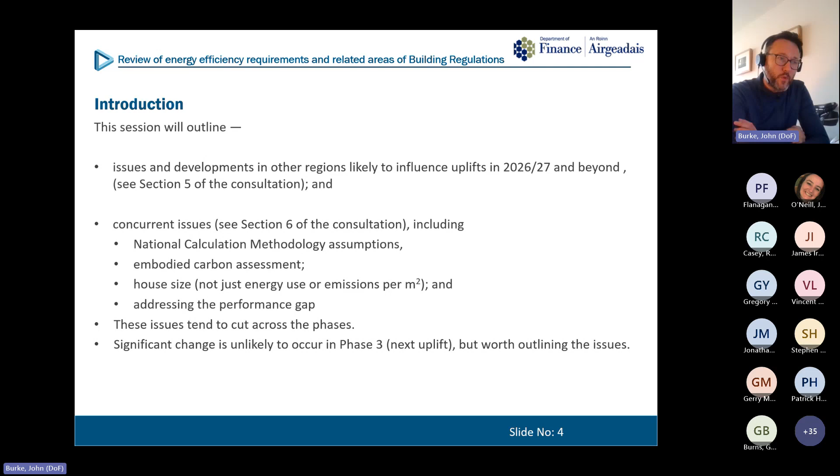But these issues are quite complicated and, as I say, quite cross-cutting, going across different administrations and all sorts of different things. So we don't see them as being able to be changed in time for phase 3, because phase 3 and the uplift needs to progress. But we do think it was worth outlining them for this broader perspective.

So, as this slide says again, the last measures introduced in England were intended to go as far as possible whilst acknowledging that the transition to low carbon heat requires market technologies such as heat pumps and the associated skills to be significantly developed. So these are informing proposals.

England's last uplift is informing proposals for our phase 3, and that's what the bulk of the discussion in these sessions has been about to date. But there is a strong indication in some of the early tentative moves towards future building standards or future direction of travel that's been outlined by England.

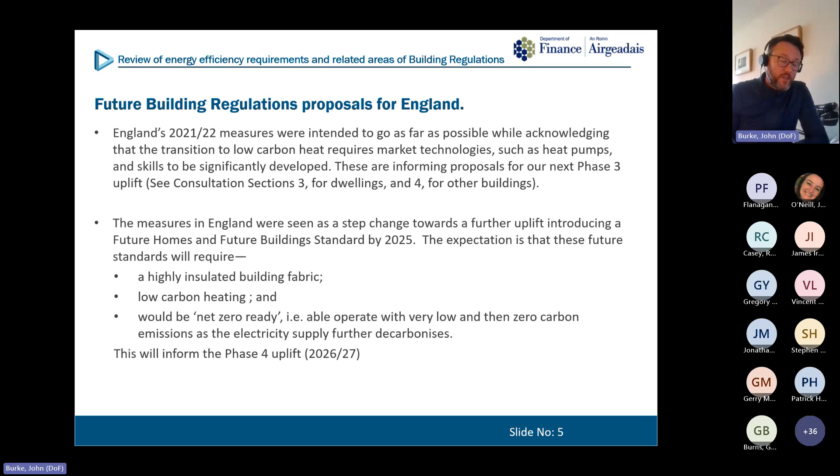The expectation for phase 4 is that we would have buildings with a very highly insulated building fabric that would use low carbon heating and would be viewed as net zero ready. This means they would be able to operate with zero emissions eventually when the electricity supply is fully decarbonised. So they may not be net zero on day one in terms of operational performance, but as that electricity or district heating supply decarbonises, you'd find that by 2050, or earlier hopefully, they'd be at a net zero level of performance. That broad expectation is central to the phase 4 uplift considerations.

In terms of timescale, we're waiting for DLUHC's Future Homes and Future Buildings consultation that's expected soon. But we're also cautious because quite often consultations and proposals come through that are significantly changed before they're actually implemented in England. We need that implementation in place to be clear on where things stand so we can take our developments from that, and we don't want to delay getting on with doing something meaningful in the interim.

So the department's phase 3 work is intended to ensure improvements are progressed as far as possible in that interim. Phase 4 measures will then adopt or learn from England's Future Homes or Future Buildings measures, meaning phase 4 would likely occur in 2026 or 2027. There are some details and hints around what that Future Homes consultation might look like.

When we talk about having high or good insulation values, they've outlined typical U-values of 0.15 for walls, 0.11 for roofs and floors, and 0.8 for windows. There's a fairly strong suggestion that air tightness might be 3 cubic metres per hour per square metre at 50 pascals, but it could be less.

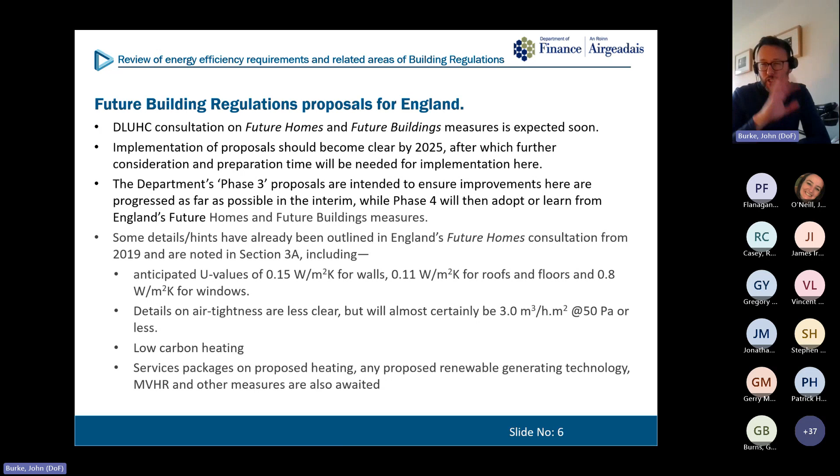They've intimated that low carbon heating would be an expectation, but other services packages and various flexibilities that might apply to different building types would all need to be considered to see whether this is appropriate or viable in those circumstances. That's the overarching position we have, or can see going forward.

Alongside that, there will be consultations on SAP and SBEM, the domestic and non-domestic national calculation methodologies, and we'd anticipate those consultations occurring alongside or as part of the Future Homes and Future Buildings developments. We encourage local responses to that because we're so reliant on then adopting the UK's methodologies and things that flow from that.

But at the same time, that's what's in our section 6A here - we're keen, because we will have discussions with the UK government at various stages, or we're trying to come to terms with it all, that if there are any local issues or particular concerns or feedback that comes through, we can gather that together and maybe have a particular influence on how that rolls out in England. So the different fuel mix and context here might be important in informing how that goes.

It was just to signal to you that there is a review of SBEM. We are aware of that. I think it's principally dealing with industry stakeholder engagement, but they're looking at reform of some of the activity classes and characteristics that apply to non-domestic buildings.

They're looking to update that from evidence from those various building types and building classes to get a more accurate benchmarking about what level of improvement might be possible. Clearly improvements in some building types like hotels might be of a different order to the scale of improvement that might be viable in a largely unheated warehouse, for example. They have different profiles, different characteristics, and there's a lot to be explored in all of that.

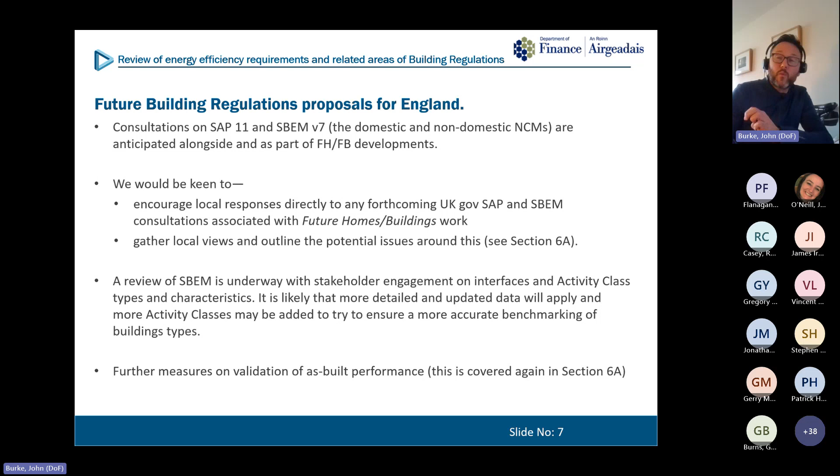Similarly, we'd expect that in the future homes and future buildings work, there'll be work on validation of as-built performance and how that might be improved or seen. We really do learn from and build upon some of the lessons involved there. So whilst we are gathering evidence here and will try to use and communicate that, that shouldn't rule out direct input - we'd really advocate for you to consult whenever these consultations come through from the UK government.

So that was future homes and future buildings and what's happening there - that's the building regulations proposals for England. Another strand to this is developments in boiler policy. We've outlined something on that.

The CCC advice reports - this is the one we've quoted for Northern Ireland, but there are similar approaches being advocated for other parts of the UK. They're pushing for a position where all new heating appliance installations should be zero carbon, with earlier application to homes off the gas grid. This has implications for supporting infrastructure and the electricity network, so our colleagues in DFE are mindful, and it also leads to challenges.

There are also obvious challenges in installing low carbon heating systems in existing buildings, in that they tend to work best with low temperature heating alongside fabric and efficiency improvements - it needs that whole integrated package to work best. We're mindful other regions have similar mandates or directions, but there's no clear provision yet as to how getting to a point on this particular issue - boilers, particularly replacements in existing buildings and dwellings - is actually going to be achieved.

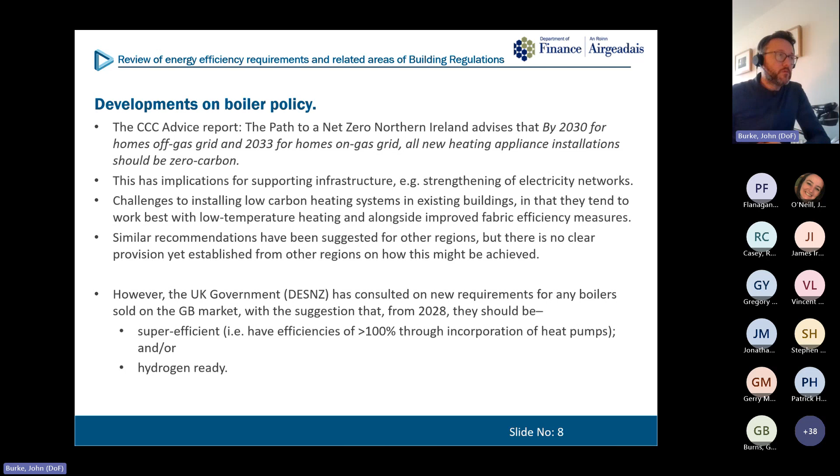Admittedly the timescale on it is a little way behind future homes and future buildings, but it is looking at retrofit boiler replacements, and it's unclear if it would be implemented via building regulations, which would set the standard for replacement boilers when installed, or whether it would be done via a product standard. If it were a product standard, that would mean it wouldn't really be a building regulations matter - the only boilers that could be sold would be off this level of provision. There might also be something in future homes and future buildings on this area - we'd need to wait and see.

But we think the principal focus of future homes and future buildings will be on the new build standards. Any proposals to require hydrogen ready or hybrid heat pump boilers in GB could be subject to the Northern Ireland Protocol. There's an issue there potentially, if we were changing product standards, as to whether GB product standards would apply here, or whether EU product standards would apply, which would be more eco-design perhaps.

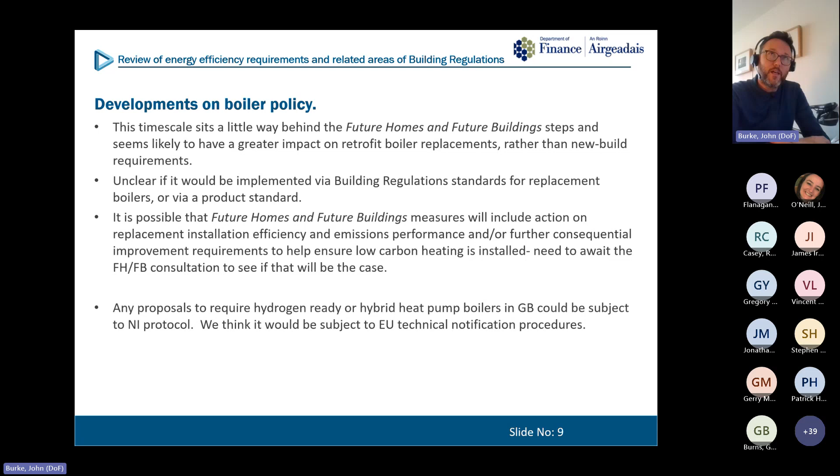That's all quite a complicated area, and with EU notification procedures to prevent barriers to trade and things like that, it all becomes quite an interesting or fraught position for us to consider, especially as we are only really a building regulations unit. So the wider position on that is a developing picture.

We're also mindful, if we move away from England and take a slightly wider approach, there's some really significant developments in Scotland that we think we've drawn people's attention to in the document. There are two significant measures: one is effectively a ban on direct emissions heating, or a requirement for zero direct emissions heating in Scotland, and the other is a commitment to develop new standards such that Scottish building regulations would require a passive house equivalence standard.

If we look at the ban on direct emissions heating, which is due to apply in Scotland from April 2024, it's preventing basically any combustion appliance for space or hot water heating in new dwellings or new buildings. I think that would also include what they call conversions or material changes of use to create a new dwelling or new building, subject to a building warrant application from April 2024.

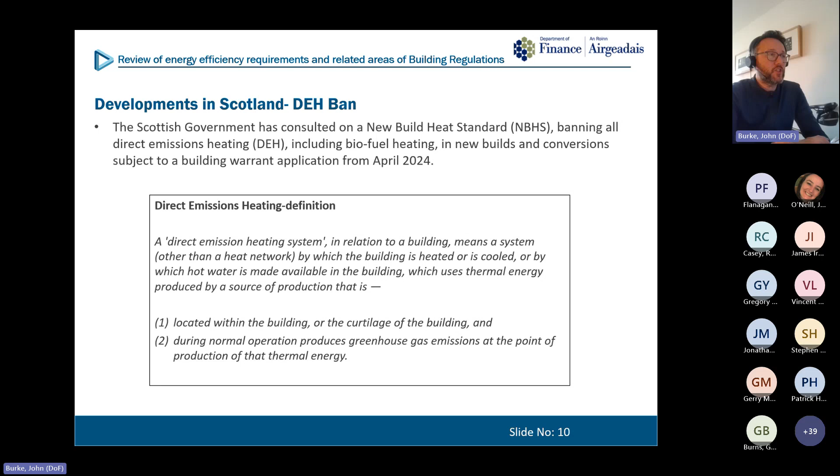There's a definition for direct emissions heating, but it basically means no tailpipe emissions in your building. As such, we think that means you'll be effectively restricted to electric heating or district heating, with electric heat pumps likely to be dominant given the extent of district heating currently in operation. It'd be quite hard to meet the Scottish standard with direct electric heating.

This is because of the primary energy, the delivered energy target that would emerge. It's worth saying this is a slightly separate measure to the way uplifts in Scotland and other UK regions have typically been delivered, in that rather than a refresh of the notional dwelling you compare yourself to, or an overarching review across the part, it's a very specific requirement just saying this kind of heating is not acceptable or not permissible. It doesn't change the emissions performance requirement or the delivered energy performance requirement that Scotland has.

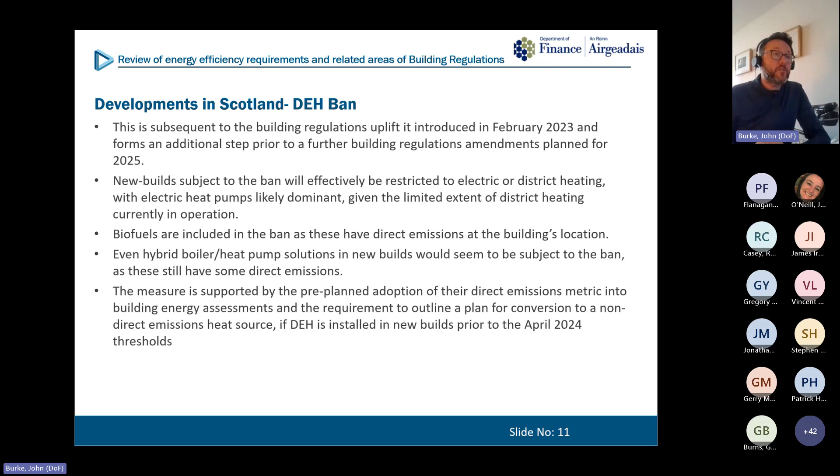The measure is supported by the pre-planned adoption of direct emissions metric. They've always had that in building regulations assessments, and the requirement to outline a plan for conversion to a non-direct emissions heat source if direct emissions heating is installed in new builds prior to the April 2024 threshold. Some of their earlier uplifts have been signalling this to some degree, that you had to plan for how you were going to change to a zero direct emissions heating system in the future. If you were using a gas boiler, oil boiler, hybrid or biomass, you had to show how you were going to move away from that as part of your application. I don't know that there were many tests around that, but you still had to provide that assessment.

The second significant measure coming through in Scotland, which has a Green Minister working on this, is they've committed to develop 2024-25 proposals with a view to implementing new build standards equivalent to passive house standards. So they're looking for a Scottish passive house equivalent, and we've been hoping to monitor this or see how this reviews or comes to be. But again there's quite a lot of issues that we see with that.

It's worth noting that full Passive House certification expects the use of approved designers, products, software and installers that have all been approved by a private sector body. So there's an issue there to ensure performance and build quality. Our building regs don't give us absolute powers on that. We can suggest it strongly in guidance, but we can't limit work to being done by just one profession or one group - we can't do that absolutely. It's also anticipated that because of that, they're looking for Scottish equivalent performance rather than actually requiring Passive House standards.

So that's noted, but the reforms will look at both the performance metrics and the verification measures. This is happening concurrently whilst England does its thing with future homes and future buildings standards. This Scottish activity is happening in a quite potentially different way of approach.

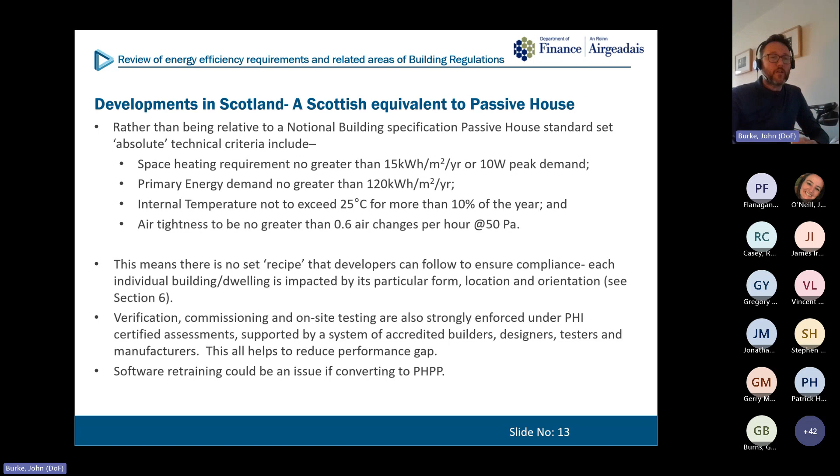Verification, commissioning and on-site testing are also strongly enforced under the Passive House Institute certified assessments, so there's extra layers of accreditation of the people doing the work, and that really helps reduce the performance gap. There are extra tests and things that would need to be there. Software is seen to be quite significant as well - the use of Passive House planning package would be a really significant thing if that were to be used instead of SAP or trying to retrain everyone in that direction.

So we're really monitoring the developments there, and we'll see what happens. But we are trying to be involved, or at least observe, and to see how the discussions on that resolve with Scotland.

Both of these scenarios tend to push significantly further towards the electrification of heat. So you would need to take into account the deliverability from a skills and overall kind of way, but also on the grid impacts and things that happen in relation to the grid. Our electricity grid in its current state is clearly impacted quite dramatically by quite a lot of that, if that were all to happen all at once.

And we'll also be passing on that this is happening through to our colleagues who are working on grid policy and grid areas, and to the utility regulator here, because we know that system is under, and grid reinforcement charging system is all being considered by our colleagues in other departments. So the outcomes of all of that interact with this.

We've said before, building regs can't completely restrict work to licensed or accredited designers, installers or testers in the way that the Passive House system promotes. So that's not always possible, although we can strongly hint at it with guidance, but there should always be an alternative way to compliance. Again, we're monitoring the outcome.

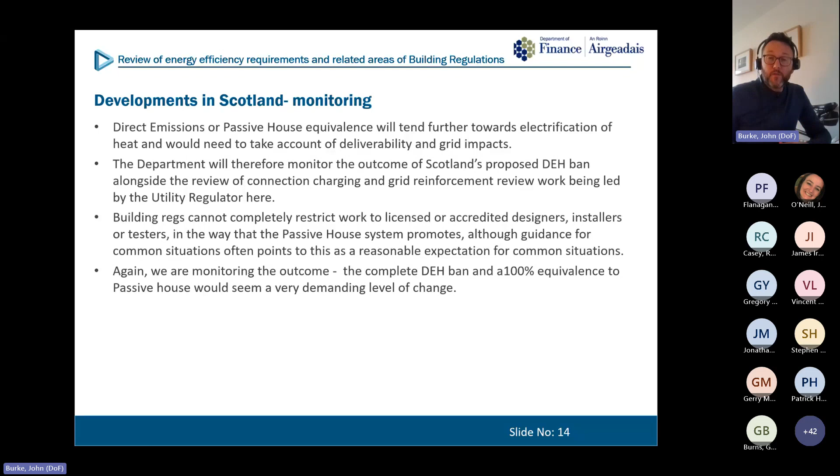The complete ban and 100% equivalence to Passive House - if you were to absolutely do every single 100% thing that was in Passive House, which some of the advocates for it would say is necessary because it's a complete package, it would seem really quite a demanding level of change. But we're keeping an eye on it, and we'll see what we can do, and if it goes well, that's certainly something that will be informative to the phase 4 proposals for 26 and 27.

Another major review that's underway is a more pan-European, pan-EU development, and that's a recast of the Energy Performance of Buildings Directive, which has some very significant potential uplifts. Now, obviously, we've left the EU, so there's no absolute requirement to implement any of the things that are in it. However, we don't think that it's embedded as a Northern Ireland Protocol issue.

It's not about products or standards that are passing across the border, but obviously it will inform developments in the Republic of Ireland, working with there, and obviously it sets a kind of tone or level of expectation across administrations, which bears consideration. So the aspects of this which might be applied through the building regulations - I think it's important to outline not everything in the EPBD is a building regulations matter at all.

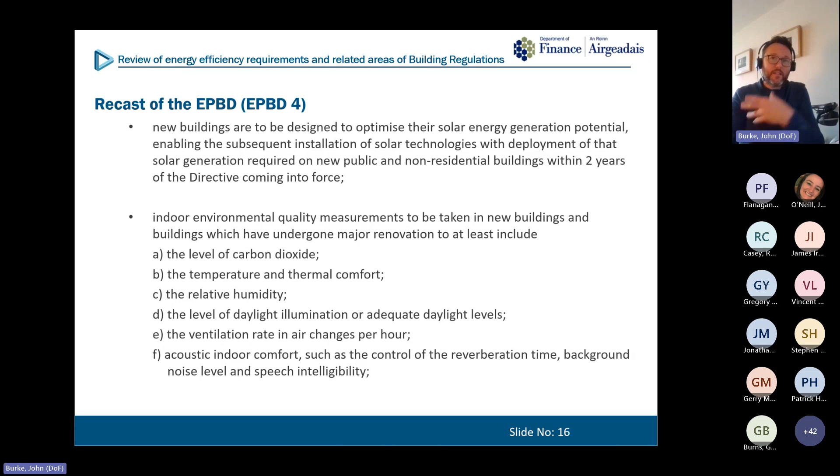These are quite demanding multiple performance requirements that would all have to be brought into play and added to the regulatory provisions. It includes continuous energy monitoring in certain buildings, and it also has measures for increased levels of provision.

There was a session last week on EV charge point infrastructure, and it looks like the EPBD is already moving on from that to require higher levels of provision and to include charging for e-bikes and similar, taking efficiency of load management and the grid into consideration with pre-cabling.

So quite a lot of extra things in there, and one of the significant ones being that any charge points would need to be able to support bi-directional charging, so they'd be able to export from your car to the building as well as charge your car from the building. That balancing and smartness is all starting to come into play there.

There are a number of measures that go beyond the scope of building regulations with a focus on requiring or promoting retrofit. They include new energy performance requirements, looking at EPC bands of performance for existing non-residential buildings, and then applying that to existing residential buildings by 2030, 2033. That's an interesting challenge.

It's worth noting that the EPC banding probably wouldn't be in line with the cost banding that's used, for example, in domestic EPCs here, which is a cost metric. I think most EU regions have a primary energy banding metric—certainly the Republic of Ireland does. So how you band all of that is another whole issue that's in the directive.

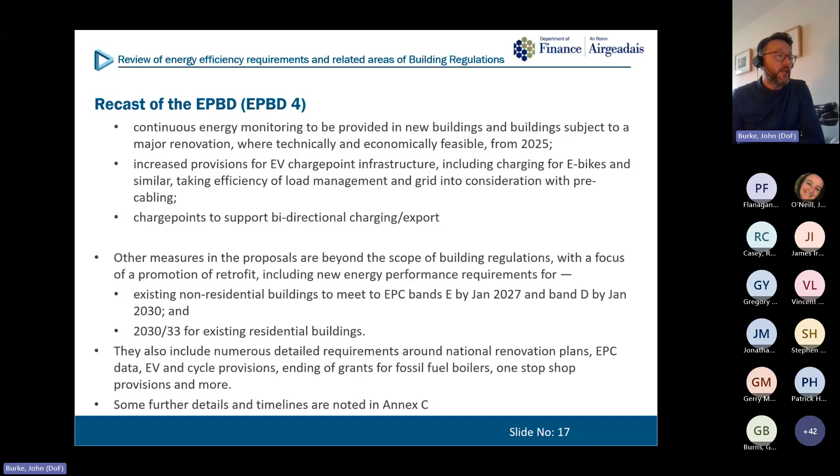It goes on and on, there's quite a lot of it. But basically, elements in blue we've suggested might have been for building regulations had we been subject to this directive, and items in green might have been for other measures—principally, most likely, many of them under the energy performance of building certificates and inspections regulations, or under some similar provision, or led by another department altogether.

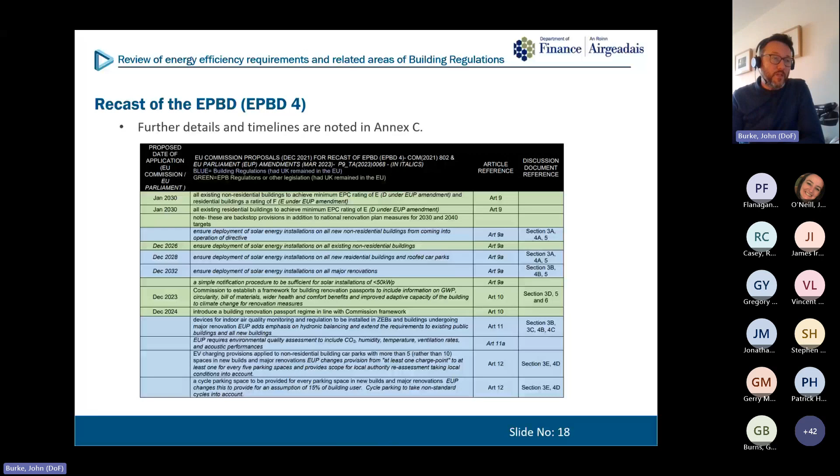So it's the blue ones there that may have been most applicable to building regulations. That's not to say there couldn't be some degree of interchange around that—it would have needed to be discussed interdepartmentally.

So where does that leave us with our proposals for phase 4? Well, to summarise, we expect to maintain a watching brief on all these developments to help inform phase 4 and beyond. We'd still suggest the proposals are likely to be significantly influenced by developments in the Future Homes and Future Buildings programme in the first instance, but we await the consultation on that and we'll see how that goes.

In any case, and this is the benefit in pushing this message out to industry, it's really likely that very high fabric performance and low carbon heating, such as heat pumps or heat networks, would be the standard expectation for new builds here by no later than 26, 27. That's the direction of travel, and I think we can be fairly clear that's the mark or the way we're planning to go.

Aspects of much of this may be included, or some of this might be included earlier. We do have an option for phase 3 to go with a heat pump led notional dwelling, and that might bring some of this thinking forward a bit if it were to be adopted, but it's a very challenging prospect to try and implement.

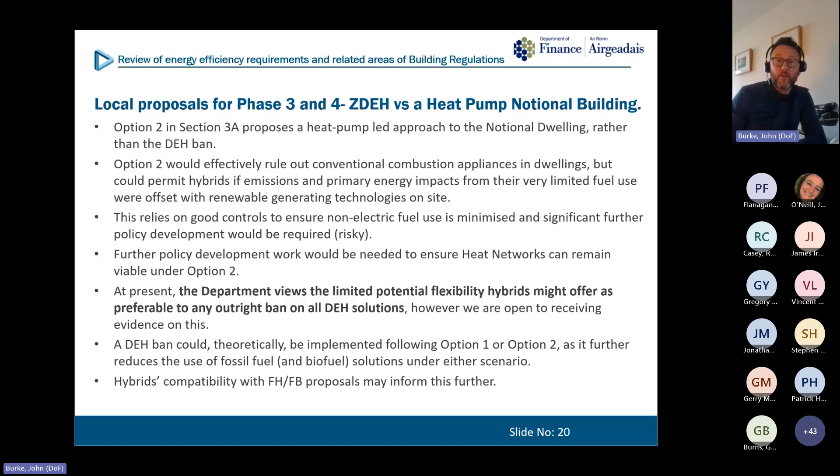Similarly, we don't know what the position will be with hybrids and how they're planning to be treated under Future Homes and Future Buildings. So again, a lot is hanging on what comes through in this consultation from England, where we're not aware of the details yet. We're keen to try and find out more on that, and how that goes, and where that leaves us.

Similarly, when we look at Passive House and the proposals there in Scotland, we'll follow how that works. We go on and discuss a bit later some of the absolute metric principles and how that works. So there are clearly advantages in having absolute metrics. It means every house gets a similar regular outcome, not inadvertently badly affected by its location or altitude or different conditions. Everyone's treated equally in terms of bills and running costs, but not treated equally in terms of capex, the capital expenditure to get it done.

So there are pros and cons. There are reasons why a notional dwelling specification was proposed and developed years ago, why we compare to that, and those reasons still exist. By having a notional dwelling specification, you can set up a system that will always guarantee compliance. If you move away from that, you've got less standardization, and that's likely to slow your delivery, because every single home and location needs reconsidered and adjusted, unless you're significantly passing the targets in the first instance.

We think there are quality assurance aspects on the build, so the whole Passive House system requires everything working, and that means there's lots of societal and skills improvements needed to ensure you get that whole piece working together.

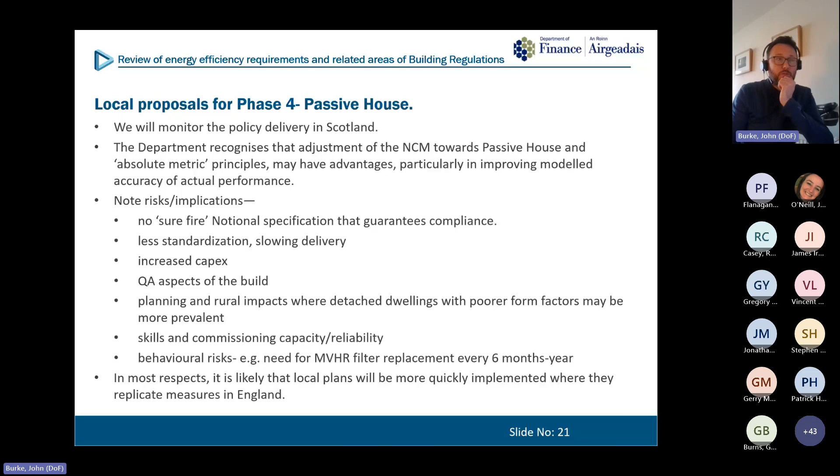Again, as with phase 3, anything that gets done in phase 4 has this wider cross-departmental interconnection with a world of lots of other issues that we're all reliant on. To the extent where I've had to change the font size to be smaller so it all fits on the slide. But the list is there. It's the same as phase 3.

We're affected by grid, by skills, by what happens in terms of smart systems and smart meter rollout, flexibility, and management of peak loads, and whether our grid can cope in the same way the GB grid or the grid in other regions might. You're looking at implications on EPC fitness and how you would migrate from one system for EPCs now if you moved to absolute metrics rather than using UK averages, and how that would interact. It's a really complicated picture how that all works together, and there will be mutual interrelated issues to be resolved or reconsidered in the midst of all of that.

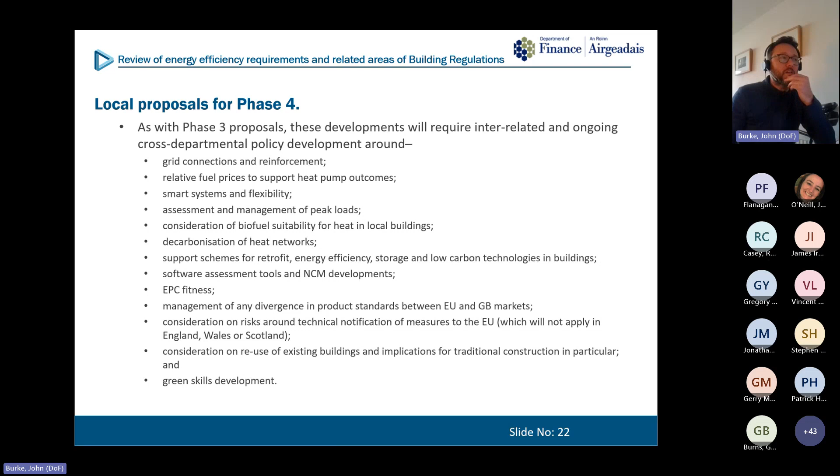So the list is there. At the end of phase 4, the end of section 5, we have a number of questions that go through what I've been discussing, asking for your input, asking whether you think it would be best to align with future homes and future buildings more straightforwardly and quickly, and not spend too much time possibly being distracted by other tantalizing options being developed elsewhere, because it could just lead to delay and might not actually get us anywhere.

Would you support a ban on direct emissions heat generators? Is that something you think is a viable or better route to look at? Do you support alignments or efforts to align targets toward passive house where possible, if that's how that goes, or have you any experience on that?

And bear in mind how that would be enforced and delivered. It's a different thing doing it as a voluntary measure as opposed to how it all actually gets enforced - quite a different context. Do you have any advice as to how further verification measures might help ensure the standard is delivered in practice?

So we're relying on things like third-party certification of mechanical ventilation systems and acoustic tests on mechanical systems, and maybe in situ testing can be done for heat transfer coefficient, or hot plate testing on walls and things. So we're open to receive all that kind of evidence.

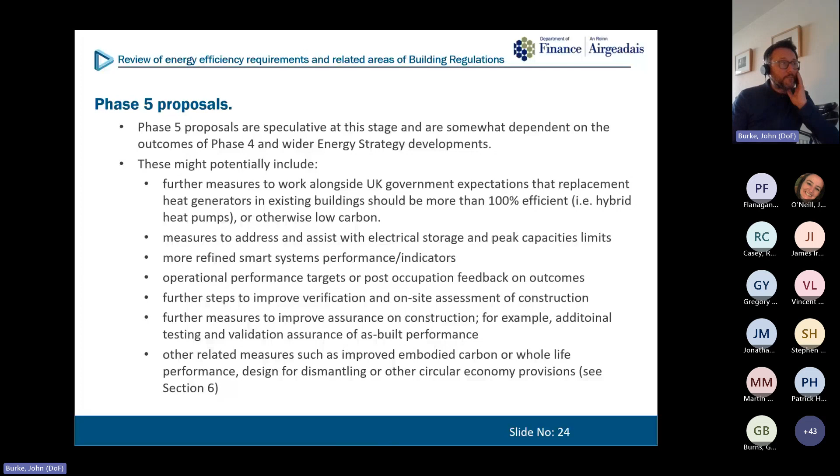So if we pause for breath for 1 second, those are the kind of specifics for phase 4 and phase 5, section 6, and they were covered in section 5 of our document.

Section 6 of our document is a slightly more complicated area, because it's looking at the uplifts and the various proposals and everything else, but there seem to be concurrent or cross-cutting themes that in theory could equally inform some of the developments in phase 3, 4, or 5. They could apply almost at any stage, or on some occasions they're almost matters of fundamental principle, where we need to challenge ourselves to think: are we designing to the metrics, or have we got the metrics right, for example, or do these other things need to be considered?

And even if we are right, I think it's important that we take a little time to review them and check and be clear about why we're doing what we're doing. There are some areas where it's all to play for, or all to consider. We've identified 4, but undoubtedly there are more, and there is more complexity to all of this. It could go on. We'll take any comments back, but these were the 4 that came through as the most relevant or important.

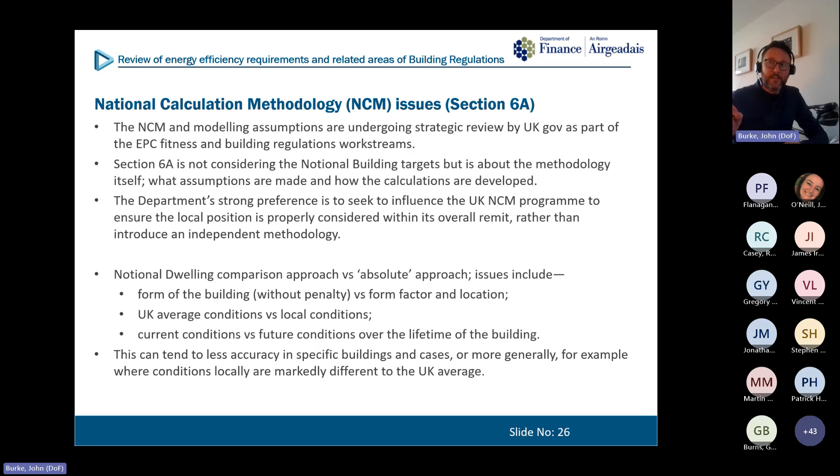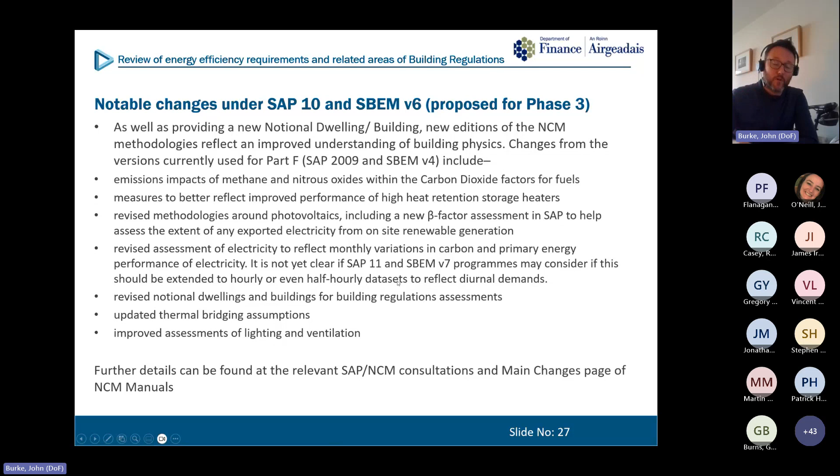I'll not go through them all, but it includes more emissions, updates the notional dwellings and buildings for building regulations assessments, and changes the way lighting has been assessed because they've improved understanding of the building physics. One big change is that SAP has now been revised to assess the extent of exported versus self-consumed electricity on site for dwellings, though not yet for non-dwellings. But those kinds of changes are typical of what happens with each edition of SAP.

The notional dwelling, as I've said before, compares a relative approach versus the absolute approach. It looks at these things we've discussed, and it has a tendency to have less accuracy. Many of these changes will be reflected in both the notional building and the actual building when dealing with building regulations. So if you have one set of assumptions for the notional building applied to the actual building, there's relatively little impact.

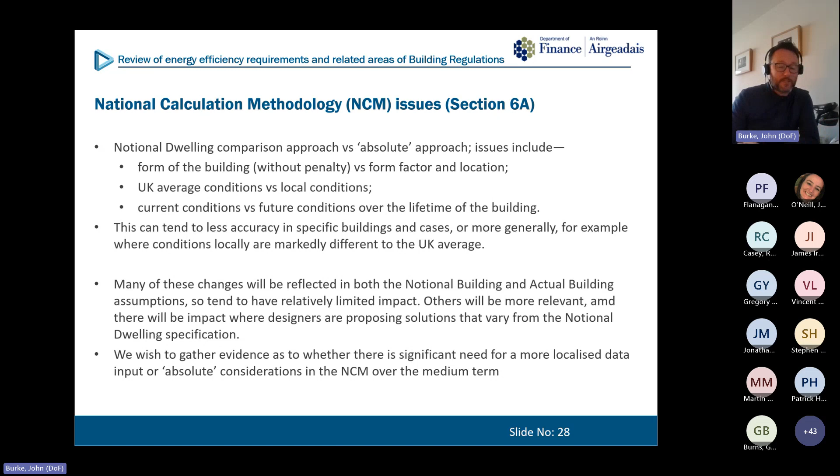So if you assume a UK average location for both your notional and actual building, there's maybe relatively little impact in trying to get building regulations compliance, because you've got the same set of assumptions applying to both. For many of those situations that's fine, but it means your outcome is less accurate to what you actually get. If you go with an average location, you should have a less accurate outcome compared to the actual performance. This is why SAP and SBEM are viewed as a compliance tool, not a design tool. That's kind of critical and important.

Here's an interesting example included in Annex B, relating to some of our options for new dwellings and the modelling we did there. In this scenario we've got three different carbon factors that can be applied: one is what's applied in the new version of SAP, the carbon factor applied in England; one is a Northern Ireland estimate, which is what we think the current carbon factor for Northern Ireland actually is; and the interim one is the current DEAP figure used in the Republic of Ireland, which takes a longer-term, about 10-year forward-looking projection of what carbon emissions from electricity will be. When we model our various buildings, we've got two notional dwellings here.

One's a gas boiler with photovoltaics and one with an air source heat pump. Under the SAP assumptions, the air source heat pump has regulated emissions of 388 kilograms, whereas the gas boiler with photovoltaic has emissions of over a ton. Both of them, incidentally, are quite significantly improved from the current position, but there's really significant improvement with the heat pump.

However, if you apply the local carbon estimates to that, you get a kind of reversal of that position, because you're getting significantly more value for the electricity generated by the photovoltaics. It's offsetting 340 grams for each kilowatt hour of electricity generated by the photovoltaics, whereas the heat pump is consuming 340 grams of carbon for each kilowatt hour of electricity it uses. So if you were to base it entirely on today's scenario, you'd end up with almost worse emissions, because there's no photovoltaics on this building but lots on that one, and because you're electrically heating this building. But that's not likely to be the long-term position.

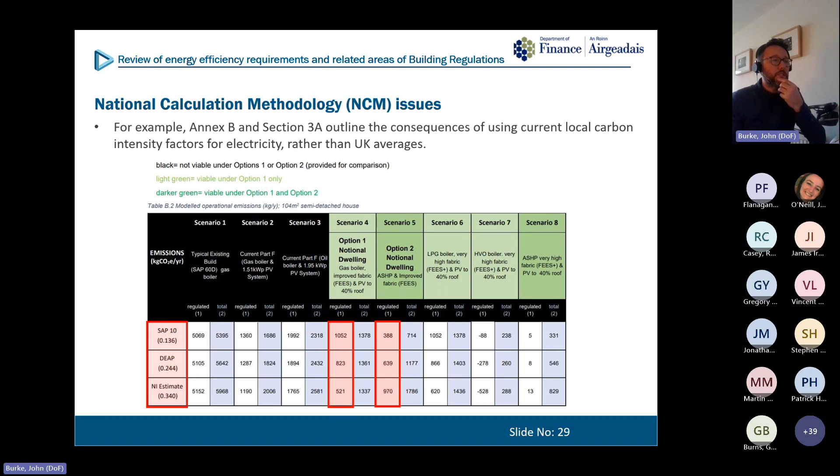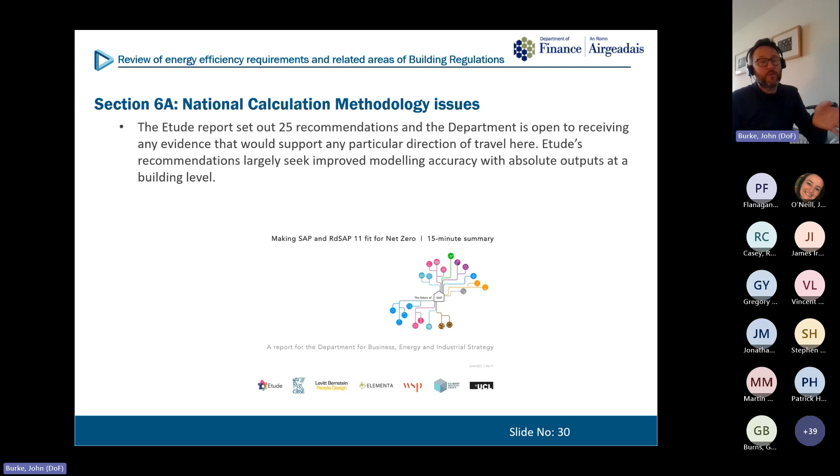Much of this area and these considerations have been gone through in quite a bit of detail. There was an Etude report commissioned by, I think it was BEIS at the time, now DESNZ, the Department for Energy Security and Net Zero. They set out some recommendations, and we have a table of those recommendations, and it does relate to EPCs. But examples of them are the one I've just given there.

A list here of some of the more significant ones in terms of the national calculation methodology and how it affects building regulations include use of forward-looking carbon factors, using a fixed value of numeric outcomes per square metre rather than having a notional dwelling that you're comparing to, using local weather rather than UK average assumptions. That's an example where there's maybe not a dramatic impact if applied to a notional and an actual building, but it will have an impact if you're doing something other than the notional building recipe.

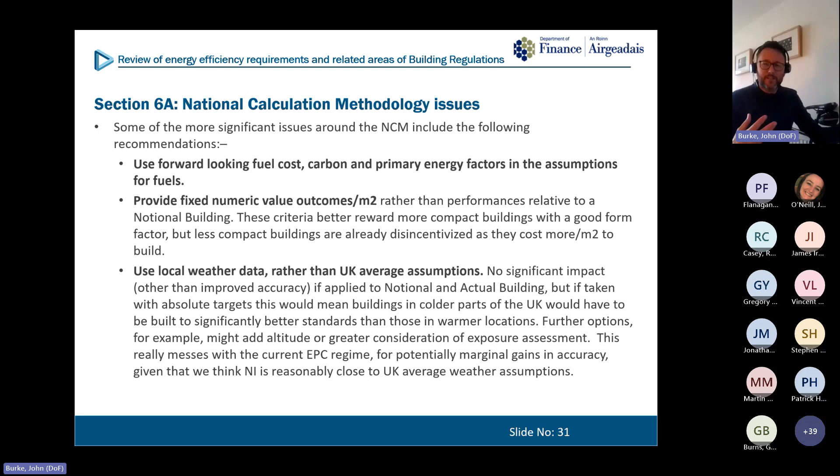If you're trying to do more offsetting with more photovoltaics, you might find it easier or more difficult depending on the grid factor that applies, or depending on the weather that applies, because you would have maybe a greater heat loss because you took the insulation that was off. It all interacts, so that's the kind of thing to bear in mind.

With the local grid factors, they've got this long-term issue about whether you should be considering the small power, electrical vehicle, and cooking loads from unregulated power. You've got the issues about how you better consider smart demand and flexibility, and then you're back to this issue about EPBD4 and how you work with that, or whether you diverge with that, and what the pros and cons of all of that are.

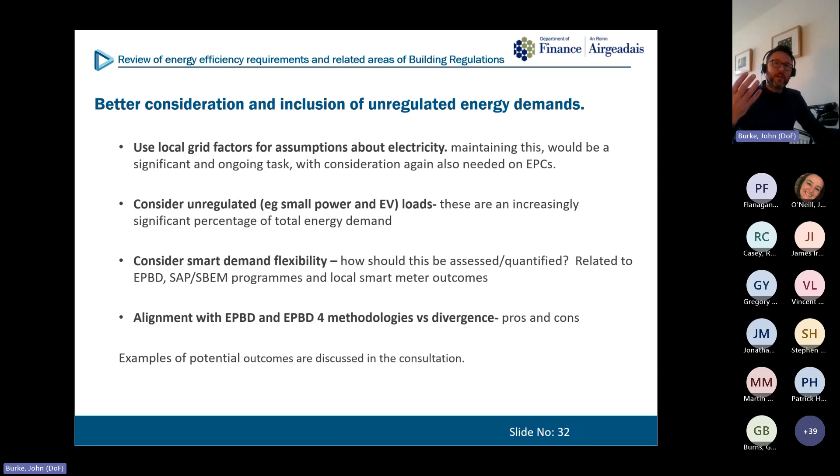There are some examples, sort of saying if you went with local weather but notional building, if you went with local weather and an absolute target — it tries to outline some examples of how that rolls out in the discussion document.

Our current thinking on this is that more accurate factors could promote better individual assessment accuracy. However, we're really mindful that the workload and the risk in maintaining that would challenge departmental resources. Some issues, such as forward-looking carbon intensity factors and potential smart readiness indicator measures, are likely to need to be developed anyway as part of the whole of the UK.

But maintaining local characteristics can be a bit more difficult on a Northern Ireland only basis. There's also issues in terms of things like getting software suppliers to update it to consider the small market that's in Northern Ireland. So working with software suppliers, we'd be interested in their sense of this, whether they think this is a necessary or worthwhile endeavour, or whether just following England and going with UK averages is just the straightforward way to go.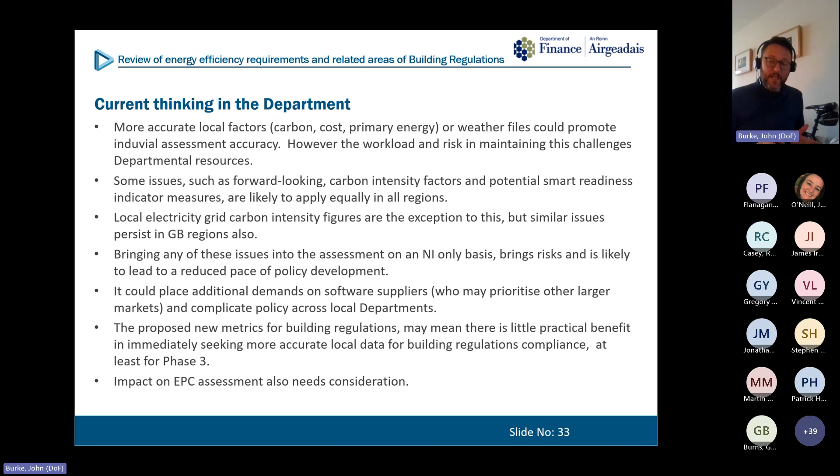We also are mindful that there might be little practical outcome of it. You might get a more accurate numeric number at the end, but it mightn't actually make a huge amount of difference to how you have practically demonstrated compliance for building regulations or not. It might be more straightforward to just go with what everyone else is doing, and then everyone has a bit more straightforward certainty, even if there has to be a caution applied to the final numbers that come out.

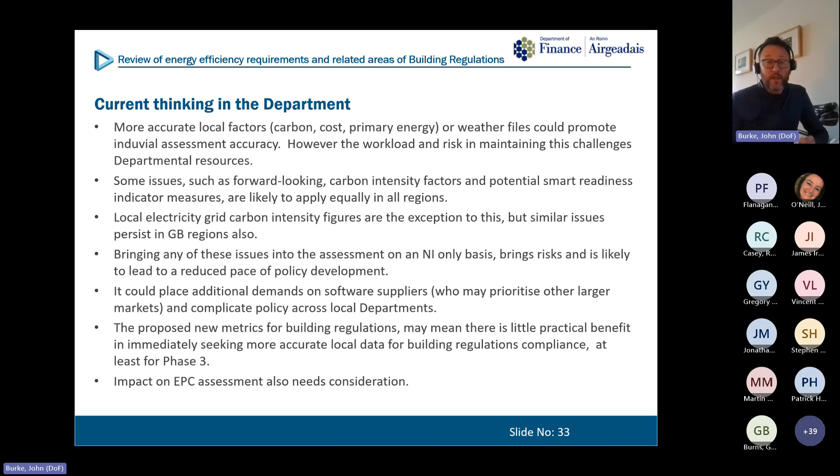We're also really mindful that this impacts on EPC assessments and the EPC fitness review that the UK is currently carrying out. So as we've said here, it's nonetheless important that policymakers and people relying on EPCs and on these building regulations assessments understand that the local position isn't necessarily reflected in the assessment procedure. We'll keep a watching brief on all of this and see how the work on metrics and smart readiness indicator reforms pan through.

We have a section on embodied carbon, and I'm sure that almost everyone listening is very aware of this topic. Whilst operational carbon deals with the emissions from a building's use, embodied carbon assessment measures emissions involved in the materials' production, delivery, installation, and also normally considers what happens at the end of the building's life. So as operational emissions are being reduced by some of the things that we're doing, obviously the carbon content of all that material and all that extra insulation and services and everything else becomes increasingly significant. The idea is that you have a whole life assessment which looks at this whole wider picture.

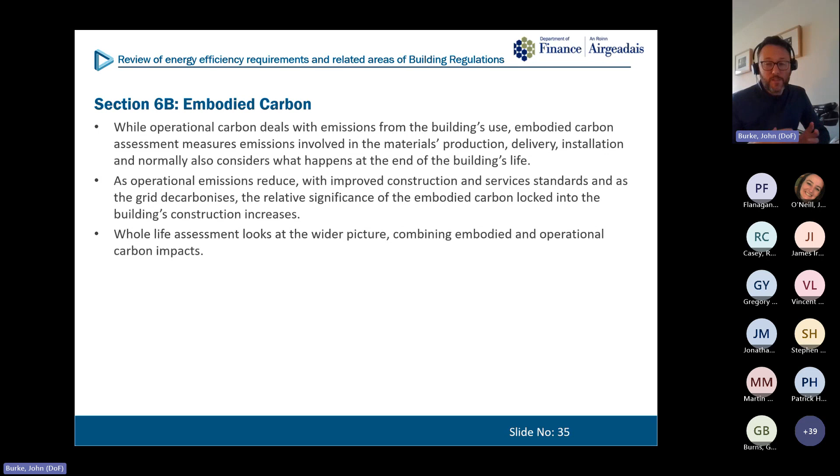And it's all kind of summarized by this diagram from 15978, which looks at these various product life cycles. So all of life cycle A is the kind of upfront emissions to get the building built. That's a kind of important stage.

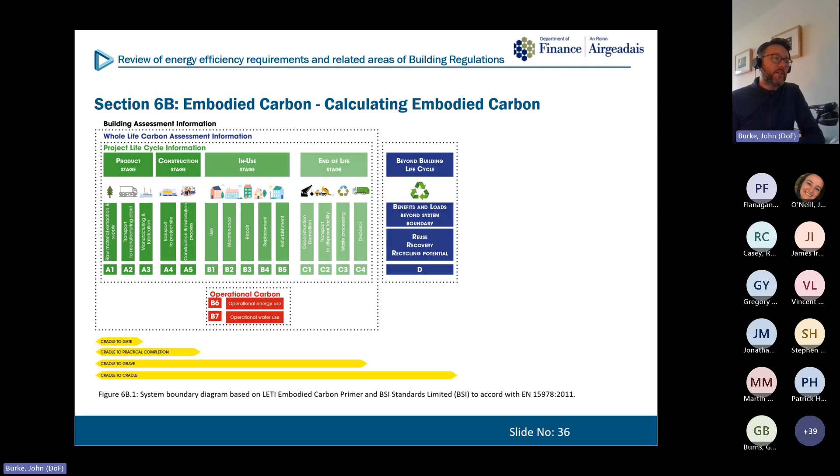The in-use emissions would be the operational stuff. There's an end-of-life stage. The operational emissions are in stage B, B6 and B7. And then you've also got the cycles for maintenance, repair and replacement. And then the end-of-life stage is the demolition and disposal or recycling. So it's a huge piece of work, and there are lots of people working on it at the minute to try and consider how that might all come to be.

We're sympathetic to the aspirations of all of this, of course, but agreement on the scope of the assessment and how the values are applied and all the rest is not straightforward, and the bureaucracy with it we consider is likely to be quite significant.

So any practical delivery requires significant consideration and agreement, really on a pan-administration basis, is what we're saying. And it needs to include a range of areas. So it's clarity on the scope of the assessment. Do you include the landscaping works outside? How do you then set a target that addresses that? If you have one office block with landscaping work and another office block which doesn't, how do you deal with that?

End of life assumptions. How do you set agreement on what the carbon factors for 20 years' time are going to be whenever you're maintaining or replacing a boiler or a heat generator? So there's huge amounts of assumptions needed if you're to try and make an assessment on that, and agreement on standardizing of those is absolutely critical, and there are lots of people working on that. So we're mindful that is ongoing.

Similarly, there could be challenges, and facing those challenges down from some sectors that might not fare well in whatever set of assumptions are assumed. And then we've got the extra challenge that even if this were agreed at GB, there could be potentially protocol concerns or issues that you're opening barriers to trade if you've made some material or something difficult to import when previously it wasn't, and a building which is routinely imported feels it's being discriminated against, or a supplier feels they're being discriminated against with an unfair assumption.

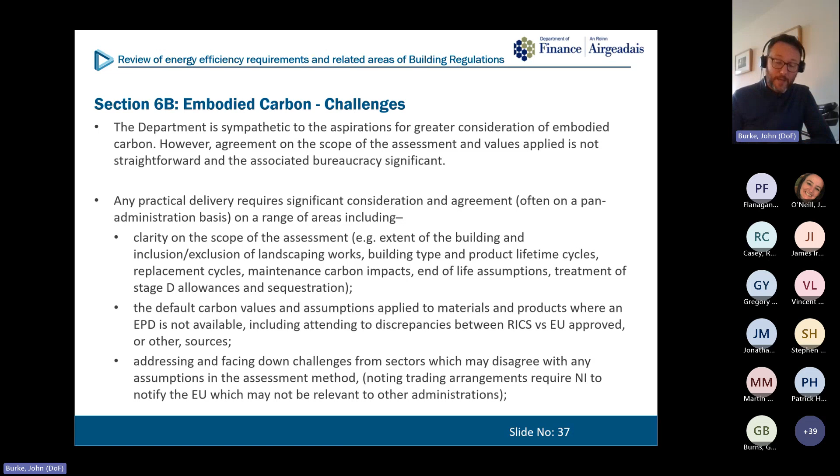Agreement on how the default values or assumptions may be reviewed over time. So as the embodied carbon lowers alongside decarbonisation of energy supplies. So in 20 years' time, you would like to think there would be less carbon in a replacement boiler than there is in a current boiler. So, but how much do you reduce that by?

There are environmental product declarations. How do you accept them, and are you content that their oversight regime is really robust and really works? And again, takes into account all the things that we've talked about.

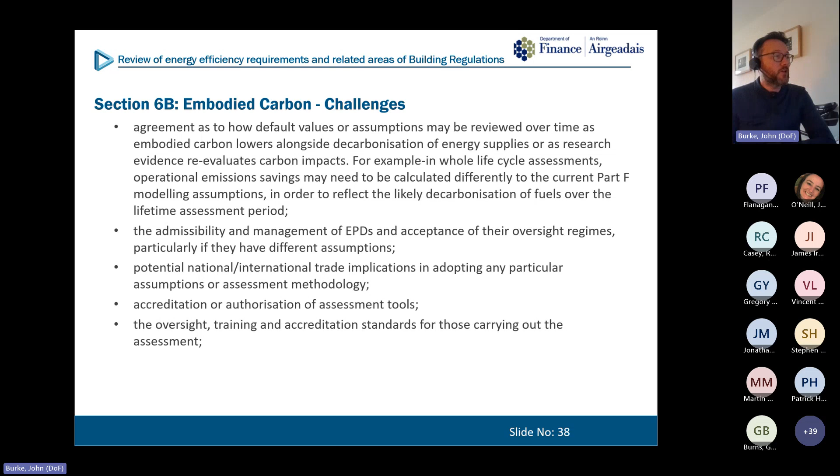There's an issue about the accreditation or the authorization of the assessment tools. Does that need to be overseen? A kind of approved software methodology. So then of course there's the oversight, training, accreditation for standards for those carrying out the work. Similarly, on enforcement, how do we ensure that building control can oversee and manage the enforcement of any new requirements?

It's a huge undertaking and a huge, enormous additional assessment. There's also the issue about how could you rectify a building if it had failed, if it had too much embodied carbon? I mean, the worst thing to do would be to somehow demolish the building, obviously. So how do you actually rectify it? So is building regulations the appropriate mechanism to try and make that kind of consideration?

So that, and data management and oversight of that and contributing to all of that, is a fairly enormous and complex area. So our conclusion or our position on that at the minute is that we expect to cooperate with other administrations on these issues rather than to develop a local or an independent approach. And I hope we can kind of see why, but that's where we're at.

And we want to get on with the measures where we know we can take action on the operational end for now. But we're keen to receive feedback on this.

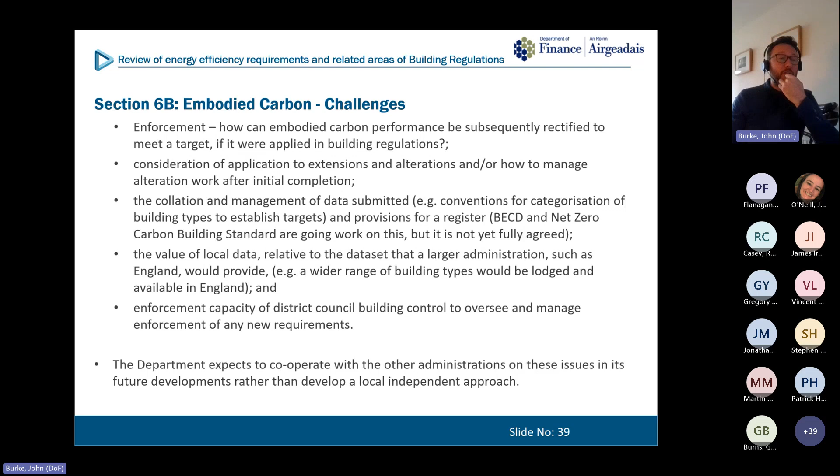We are suggesting if there might be an option for some kind of advisory or information note, or some sort of view to encouraging, so that perhaps when people do this extra work and undertake these embodied carbon assessments for their own purposes, there's encouragement to do that or to carry that out, and possibly even to feed back to district councils and or ourselves. The upshot of that, actually, have we overshot it here?

Are we requiring such low emissions that in operational phases you're spending more carbon on the insulation, getting it installed, and more carbon on the photovoltaics on the roof or whatever's needed to meet the targets we've set, such that you're actually getting a worse outcome over the whole life? We're always open to receiving that kind of research and assessment. We'll see how that goes.

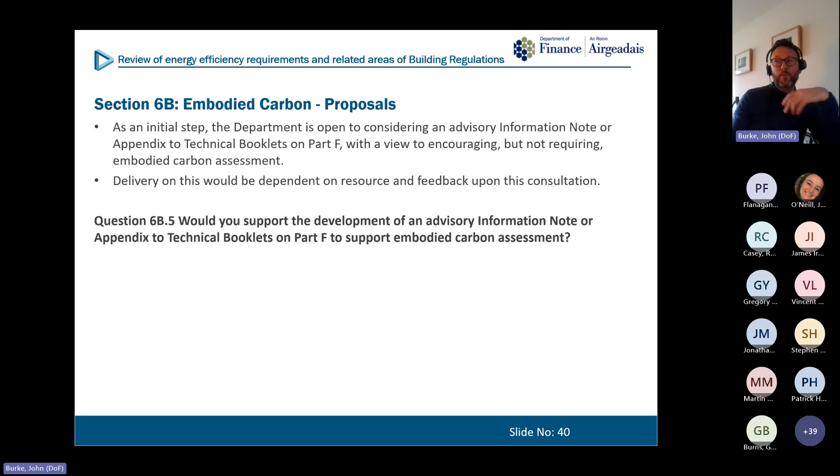Just moving on, the next phase of that is, if everything were decarbonised, there's little point in measuring carbon. So if all those supply chains were fully decarbonised, there's clearly a need for a more circular economy assessment in that scenario.

So we're keen for any information on that, or on how establishing lifetime standards, a building built to last 100 years as a minimum, as an expectation, what does that actually look like? How do you get that embedded in general? These are long-term horizon-scoping considerations, but if there's anything on that, more feedback could be provided now. This is a discussion document looking for the long term, so this is the time to make the comment.

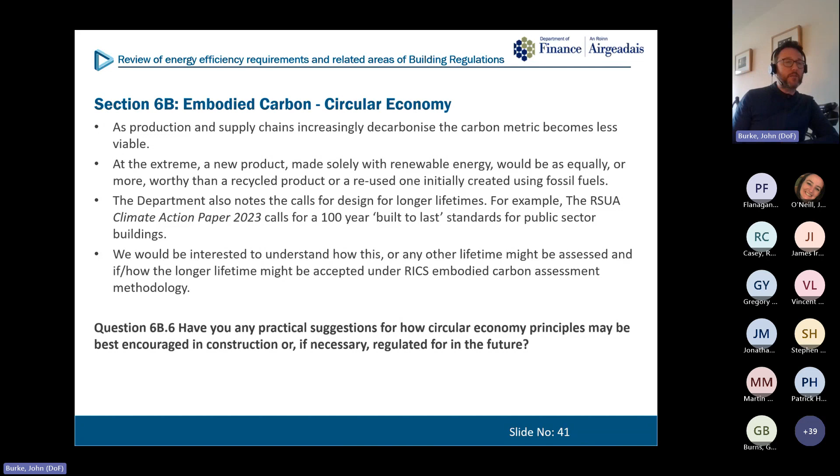Our next part is a brief note on oversized new homes. Some of our information suggests detached homes seem to be significantly larger on average here than in the UK. We're asking, is that right? Have we got that right? Is that the right thing? Because that's what our EPC data seems to be suggesting. They seem to be significantly larger than what should be required or necessary.

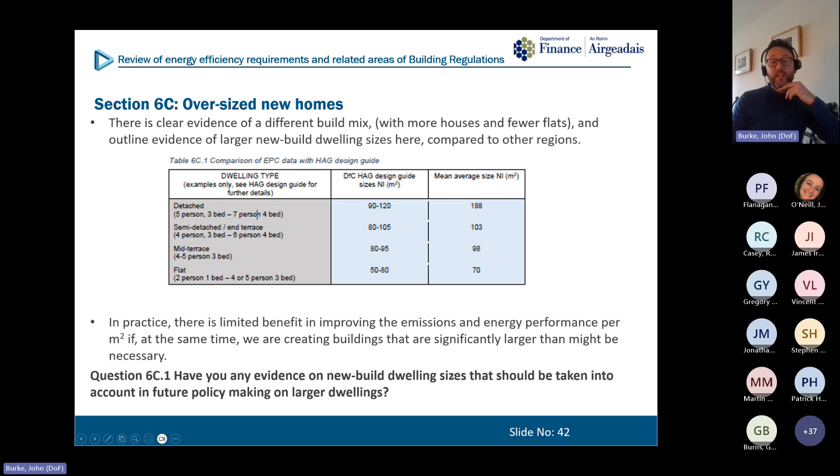And we think there's limited benefit in improving the emissions and energy performance per square metre if at the same time we're creating buildings significantly larger than necessary. So we're wondering if some kind of warning note, if you're over 25% on the Housing Association Guide standards, or either in the EPC or building regulations assessment, is something we need to be exploring, or is this just an issue for others in planning, or where should we go with this, or is this really that relevant? So we have a question on that.

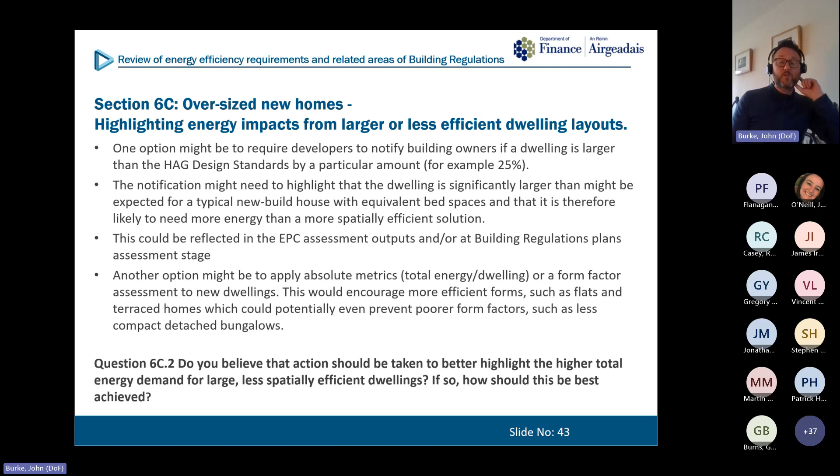And then our last area is looking at the performance gap, the difference in post-occupancy performance and what people were expecting. Some of this we think is due to misuse of SAP as a design tool rather than a compliance tool, when the compliance tool assumes average UK locations and English or UK average grid factors, and therefore you get different outcomes, even in pricing fuels and things.

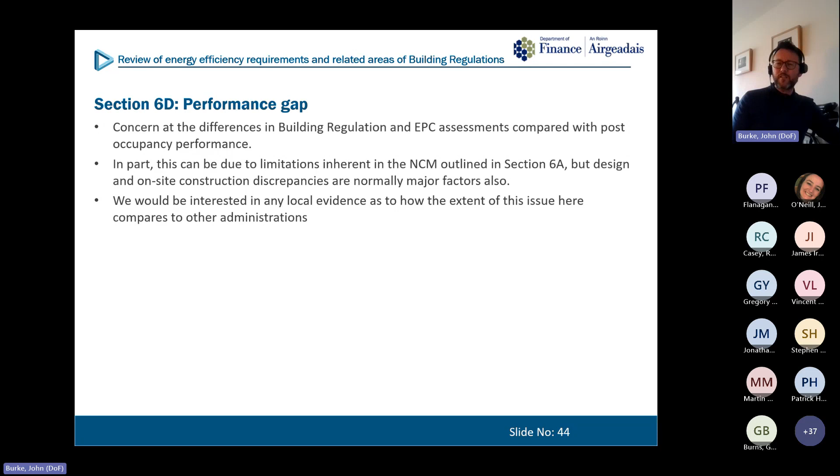What we'd be interested in, as local evidence, is whether there's a perception or evidence that there's somehow a worse performance gap here than in other regions. We don't have any real evidence on that.

We're also looking for any areas where improvement might be beneficial. It could be additional in-situ testing, new tests under development that we haven't really explored yet, or more formalized sign-off, putting your name to it that this is definitely how I built it, particularly on as-built details. We've some proposals on that for phase 3 with photography and on-site geolocated photography. But we're asking, is there anything else? What's the next step in involvement, and what's proportionate to getting there? Because you could find the costs of enforcement are more than the benefits, so easily.

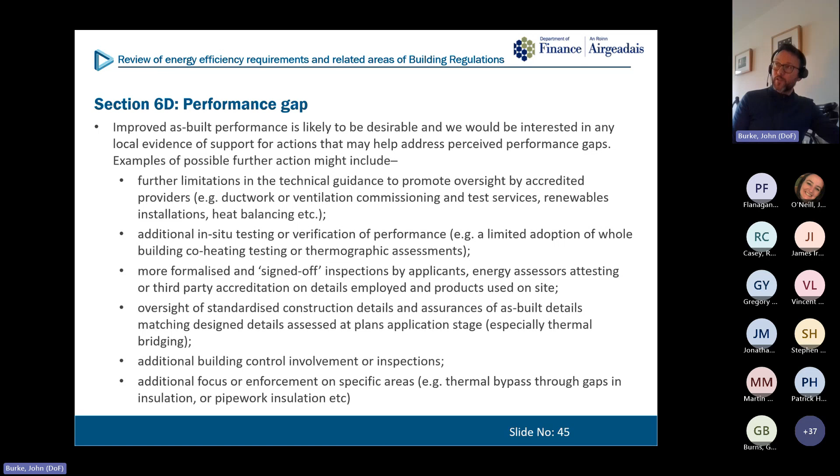And we've raised some of those issues there. This includes things like amending the NCM again, and are there issues? Should there be a factor of safety to include thermal comfort where fabric efficiencies are improved, and things like that? And feedback from the UK government's SMETERs programme, where they're able to intelligently use smart metering data and maybe 1 or 2 sensors in the building to tell people, for example, that running your home on high temperature heat in bursts is less efficient than running it continuously at a low temperature, and you'd have cheaper bills and a better outcome. Is that maybe where the differences lie between design and as-built? So there are all these considerations to be had, and again we ask some specific and some general questions on that.

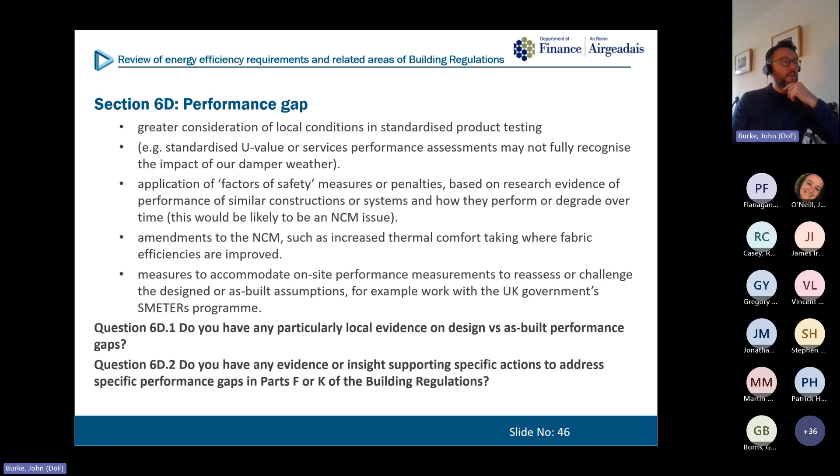So, I've taken a race through here. I'm sorry it's taken longer than I thought, an hour and 20 minutes there. I don't know if there are any questions that have come through.